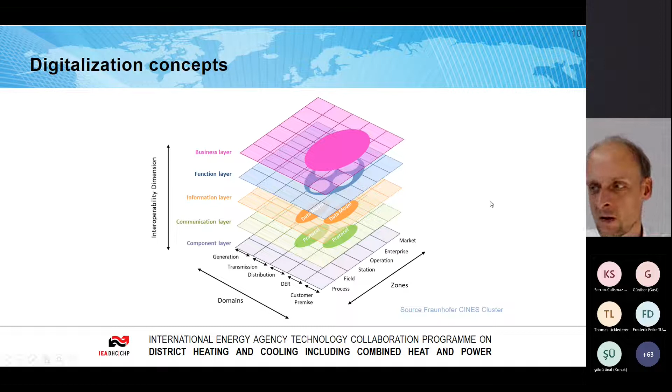For our action, this entire picture would be much too big, so we focused on a smaller scale. Our three main aspects in the TS4 project are, first, optimization of real-time operation. For digitalization here, we also include the idea of predictive maintenance of substations, pumps, or other components within the system.

The second is increased efficiency in planning procedures - using digital methods for planning, expanding, or transforming district heating schemes. The third main aspect is the implementation of new digital business models and business processes. Of course, all three components are interconnected - these are the three main topics or focus areas where we are working.

So we structured our work into so-called sub-tasks. We start with the end use, because we strongly believe that efficiency in end use is of major importance for the entire system. Here too, digital methods offer quite large potential for optimization. We have a subgroup working on digitalization of the end use and consumption.

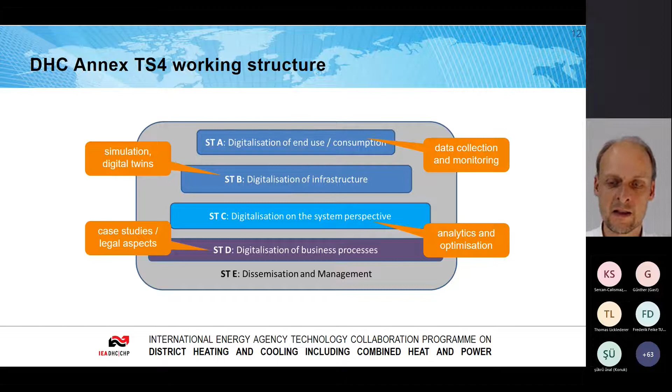We collaborate with many other organizations working on similar fields, like the German Heat and Power Association, DHC Plus, and the Danish Board of District Heating. We also have close contact with other IEA activities, like the IEA International Energy Agency activities on demand response of buildings in DHC networks, and on data-driven smart buildings.

On the other hand, we also have connections to the heat pump group within the IEA on flexibility through implementation of heat pumps in multi-vector energy systems and thermal networks. So these are our connection points with other activities within the IEA.

So first conclusions from what we can say from the first time we are working together. Digital technologies are believed to make the whole energy system smarter, more efficient and reliable, and boost the efficiency as well as the integration of more renewables into the system. So what we heard already in the morning, we need more digitalization to optimize our system on one hand and to efficiently integrate more renewables into our system.

In the future, digital applications might enable district heating systems to fully optimize their potential and to optimize the operation, and also empower the end consumer. For wider integration of digital processes, we need to tackle some challenges like data security and privacy. So we need to come up with solutions.

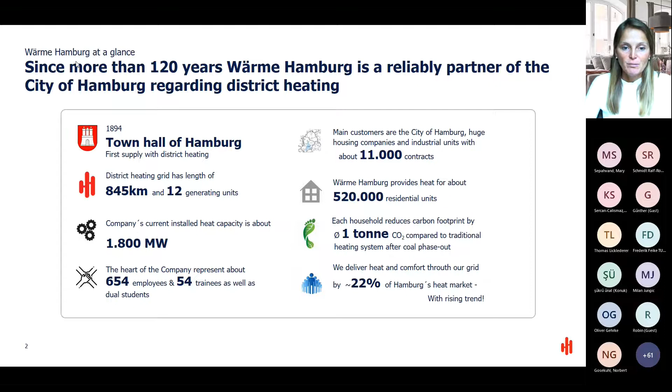So this is the IT department, let's say, on my company. But we have other projects still running, and this is what I'm going to show now. If you have a look at the next slide, for example, I brought a few examples to show what we're running currently. I think we have a huge potential to speed up digitalization, starting with summer 22 again, and in the meantime, I'll share some examples of what we're currently doing.

2 years ago, I had the pleasure to talk to this audience before, and I brought some slides for the smart meter rollout in Hamburg.

With this smart meter we installed, we can collect data every 15 minutes, 24/7, all year long. We can create this infrastructure based on data, and we would like to cross-link and automate the housing stations. We also see an application for billing issues, so we can monitor and place billing issues. We have an online data management system now for the operational data in the housings and house stations. Based on this huge amount of data, we can use it for different issues - how to steer and optimize the grid itself.

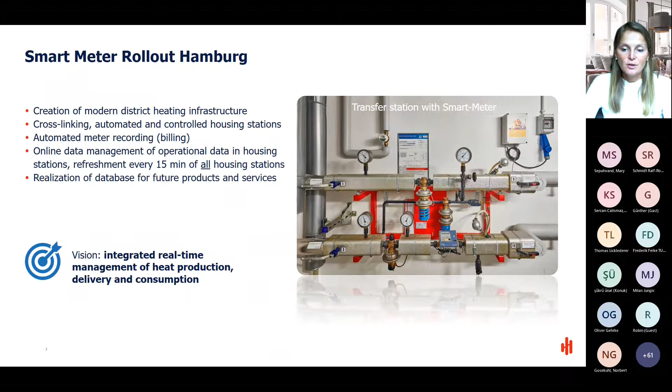And we also used this data already. Next slide, please.

You can analyze data as much as you like and as much time as you have, but usually you have a focus. For example, we looked at the return flow rates. In our technical setup, we bring heat at 90 degrees, or even more in winter, into the household, and we'd appreciate if the client returns 60 degrees. But the customer doesn't know, and we don't want to check all housing stations manually. Now we can see every single one, 24/7.

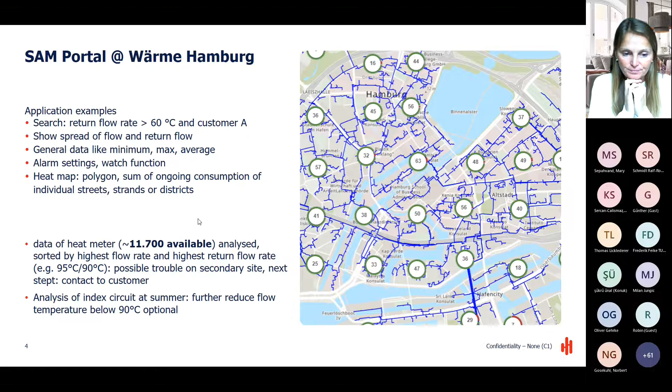With this data we collected, we can also look at other issues. What you saw on the last slide was the grid perspective, and now we can also look at the client's perspective in a different way. Usually, as Heat Hamburg or Wärme Hamburg, we deliver in the cellar, and there we have a heat meter which sums up the whole building, not each apartment, because that's not our market yet. But there are many other companies which deliver with smart meters and other technology to every apartment, to the end consumers.

We have a cooperation here with Lean Heat, a daughter company of Danfoss, which offers an IoT and artificial intelligence option. We can share our data from the cellar, which we provide online - in this case it's not online, but we still have all the data it supplies.

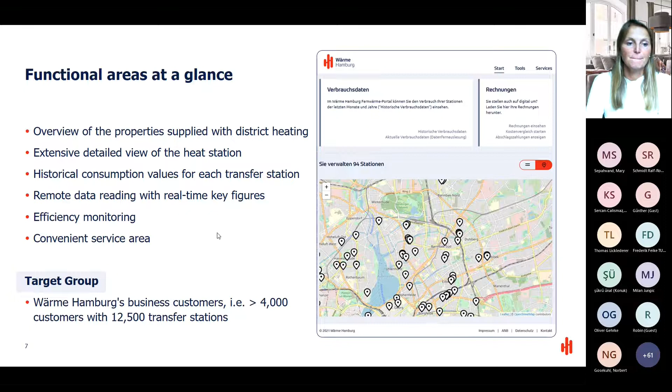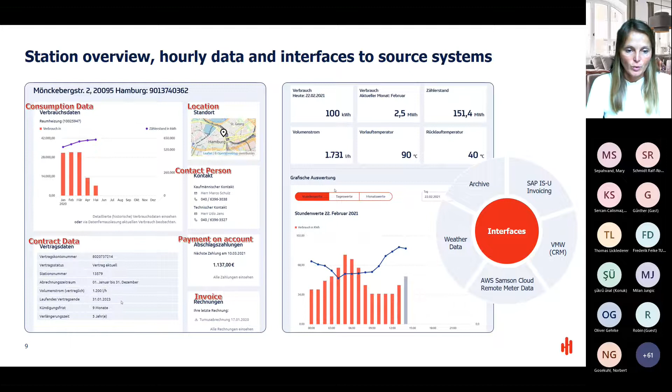So here you can see all the interfaces for the billing, for the customer relationship management, also for the cloud data, for the weather data. So this is just a glance at what we can see online 24/7 from the client's perspective.

Next slide, please. Then we also have a house connection portal for the other companies in Hamburg, for the gas grid, the electricity grid, and the water. So this client can also ask via this channel, oh, I need a heat contract as well.

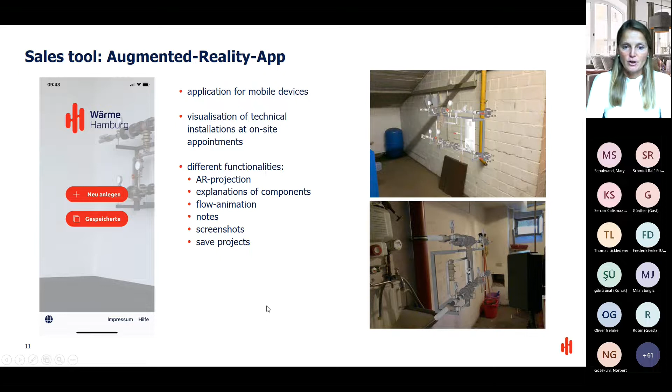So for the conclusion, let's say from the sales perspective, because I'm in sales, many issues I shared, but of course we have many other issues which will be sped up next, starting for digital twins or for many other issues. But this will be another hour to share with you.

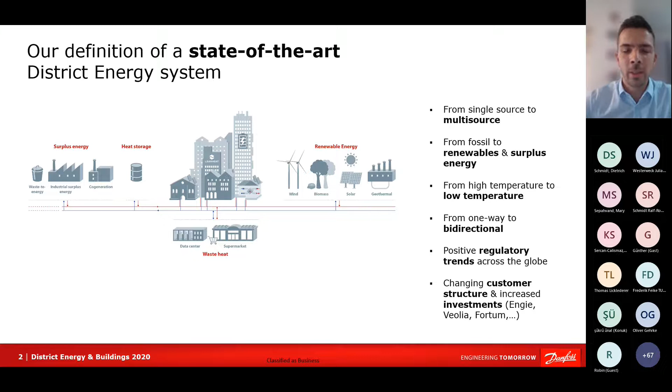Now, as I think was already indicated through Ms. Westerweck's presentation, more or less everything she spoke about was related to digitalization. We see it very similarly: digitalizing the complete district energy system, basically from plants to homes, is the one thing that enables us to operate these systems in a smarter, more efficient, and more reliable way.

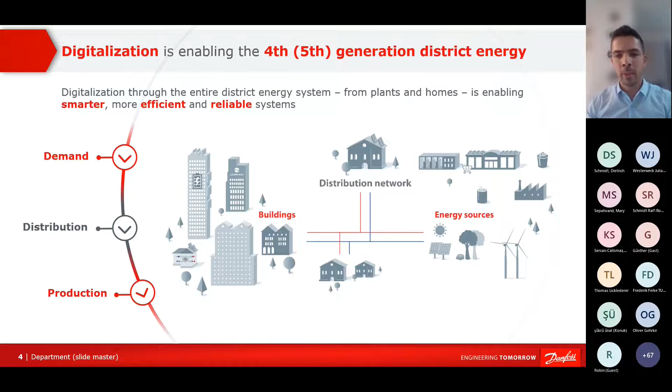Of course, we need to do it in the right way. When we talk about improving efficiency, improving production, optimizing the complete chain of a district energy system, we always need to start with the demand. I think we cannot emphasize it enough, and we need to repeat it constantly. Optimum primary network starts with the optimum secondary side. In these terms, we are also trying to develop our digital portfolio to support this.

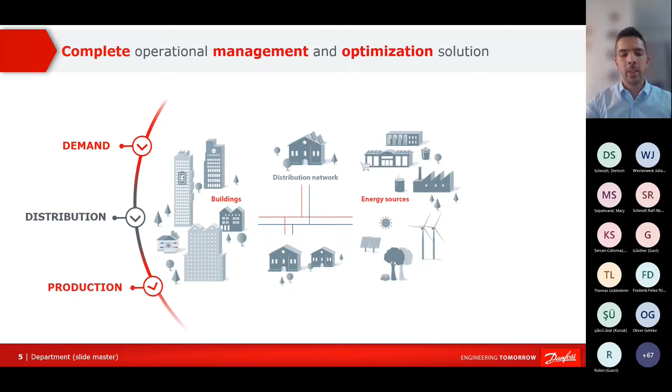Basically, we always follow the proper line. We start with optimization of the demand side, we continue with distribution, and then at the end we optimize production. Of course, it's not a one-step thing. We need to do it constantly, so it needs digital technology that we can run 24/7, the complete process. So how do we do it?

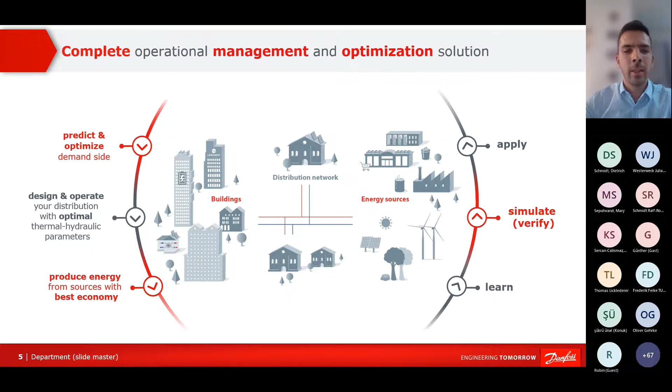Basically, on the demand side, we are trying to predict and optimize the demand side parameters. And here, we already saw in Ms. Westerweck's presentation a schematic of our Leanheat solution.

What we can do is, by using artificial intelligence, collecting the indoor sensor data, collecting the weather data, and combining this with the district heating data, we basically enable short and long-term demand prediction on a building as well as on a network level. We also enable different kinds of algorithms for auto-commissioning, for running this system in a more self-adaptive way. This means we can optimize building heating parameters like secondary side supply temperature.

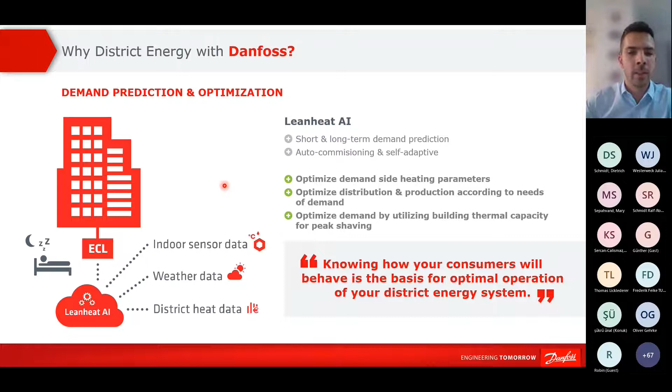Basically a constantly optimized heat curve. We can use this data from the building to optimize the distribution and production according to the needs of demand, to have a more demand-responsive system. We can also use the data from the heat consumption, the load curve, to optimize the peak footprint of the building by also using the thermal capacity of the building, with the goal to shave the peak loads, and we can do that up to 20% according to the projects we are already doing.

This is basically the goal of the Leanheat building: to make the load curve more in line and to cut off the peak, through peak shaving, but on the other side also to provide the data that we need to efficiently run the primary side.

And here, when we talk about the distribution, we have a solution called Leanheat network. It's basically a thermohydraulic modeling solution. It can be used in two ways. When it's offline, it can be used to efficiently model district heating networks for reconstructions or new-built networks. When we connect it with real-time data, we can use it combined with a calibrated network model to simulate the network conditions in every millimeter of the network, which allows us to evaluate different what-if scenarios and to prepare the most optimum distribution plans.

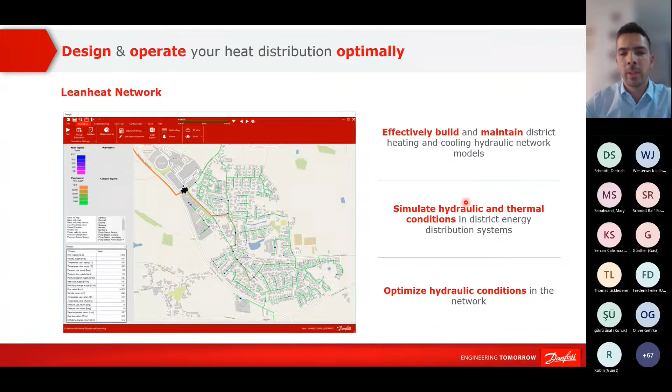I will skip these two slides to make the time shorter. I basically explained this already on the first slide.

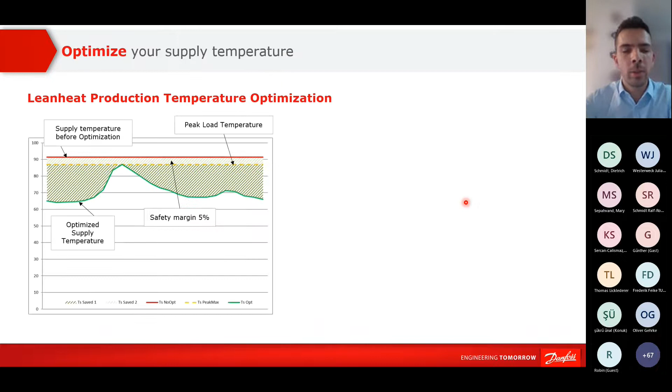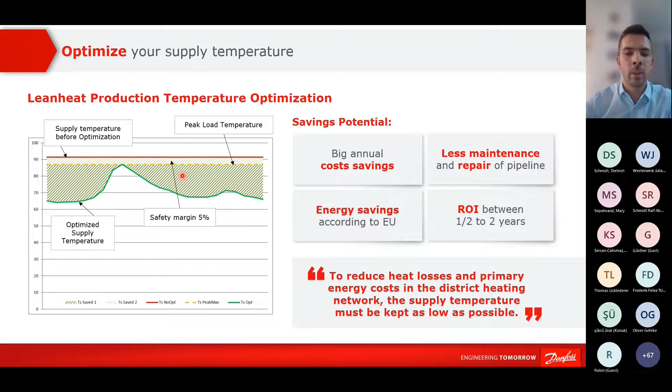And then, of course, the last part of this solution is Leanheat Production. This is basically the module that allows us to optimize the production sources. Here we are mainly focusing on two things. One is to optimize the supply temperature for the network, meaning we are moving from the traditional way of running a system on a production curve based on outside temperature. We are trying to be more proactive, based on the demand forecast and the transport times in the network, calculating the most optimum supply temperature for the network at any given time, thus ensuring that on average we are lowering the supply temperature and ensuring savings and lower network losses.

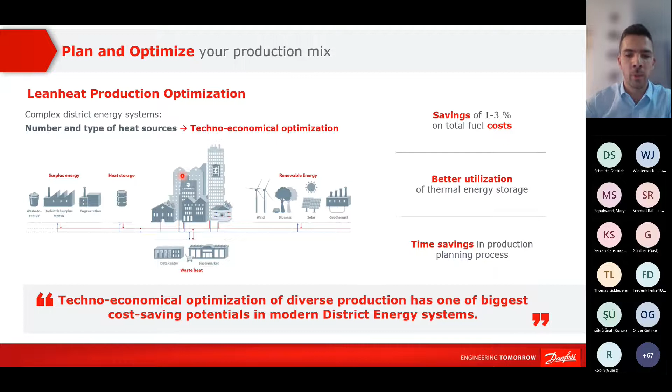On the other side, we also need to optimize production sources, because in modern networks we have multiple production sources and the complexity is increasing. We are constantly in front of a question: what combination of production sources is, at this given point in time, most cost-effective and technically feasible? This is why we are again using the Leanheat AI technology, based on all the input data, from financial data to demand prediction to technical boundary conditions, trying to calculate the most optimum combination of production sources, from a technical point of view as well as cost-effectiveness.

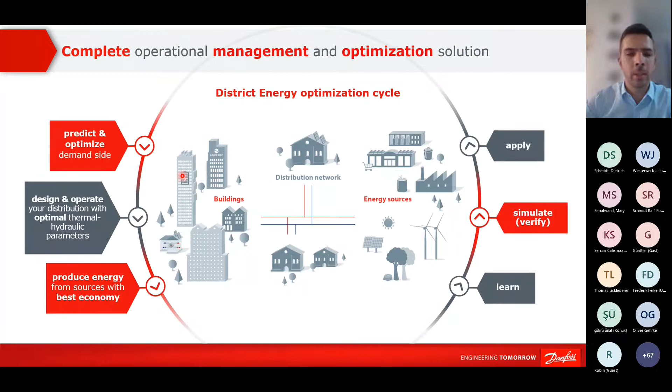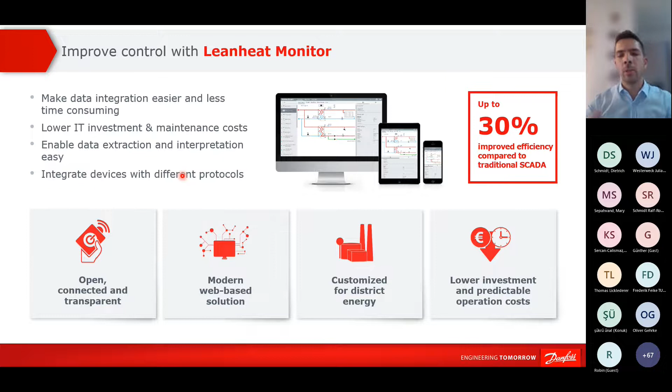By that, we are basically trying to close this circle. Of course, to perform all of this, we also need to collect the data. Here we are using our solution, Leanheat Monitor, which is a web-based solution that allows utilities to connect buildings, network measurements, and production sources. We are developing this solution fully customized for district energy, so it's much easier to implement compared to some other more industrial SCADA solutions.

At the end of the day, our goal is to offer an end-to-end portfolio of solutions. As mentioned, from the secondary to the primary side, our goal is that these things are compatible and easy to integrate between themselves, but on the other side, we are also building them on open protocols, so individual modules from this solution can be implemented also into third-party systems.

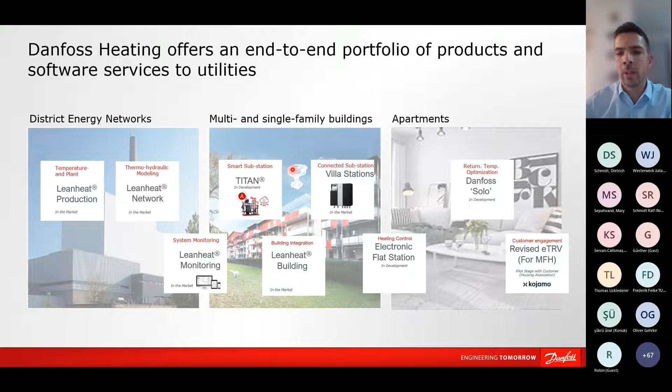Of course, it's not everything only software layer. We are working also a lot on intelligent solutions for physical products, like the Titan algorithm, which we are developing to optimize the control curve on the controller level for each building or substation individually, to perform predictive maintenance, and to detect different kinds of things like heat exchanger scaling and so on. So really a lot going on, too much to mention everything today.

Coming to conclusions, yes, and here we are. So that's it. Sorry for running really quickly through the presentation, but I hope I was clear enough and you were able to catch the most important points.

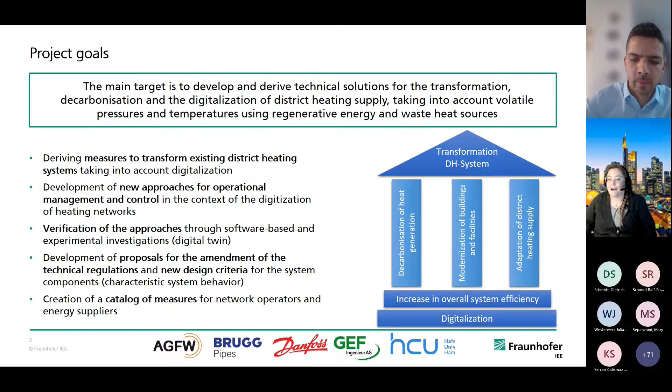Next to these approaches, the amendment of regulations and guidelines will be examined. As a summary, we are working out a catalogue of measures to bring our findings from research to the practical world. To realize the project, the test facility District Lab will be used as part of the experimental investigations.

Secondly, we have a management system and control concept. This unit serves for the basic control of our laboratory, but also for the development of new operating strategies and control concepts for flexible heating networks. That is, of course, of greatest importance for digitalization, and this includes also the testing possibilities of several components like heat pumps, pipes, and valves.

And last but not least, there's also a pipe test bench for mechanical tests of piping systems. By the use of this test bench, it is possible to carry out real tests of pipes, components, different lengths, techniques, and bedding materials.

Following this very short introduction of the District Lab, it has to be stated that the test facility, beyond the project Urban Turn, offers experimental and testing opportunities for network operators, energy suppliers, as well as system planners and component manufacturers of innovative district heating networks and, of course, district heating applications.

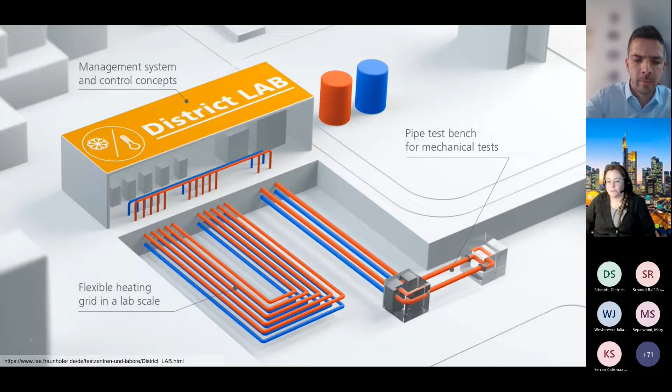But let us now return to the project Urban Turn in the context of identification of challenges for the implementation of transformation strategies for existing networks. We are analyzing new requirements, obstacles, bottlenecks, and potentials of the transformation, taking into account approaches of digitalization. As part of this work, existing design criteria are being scrutinized. We are currently completing a first draft summarizing all these aspects.

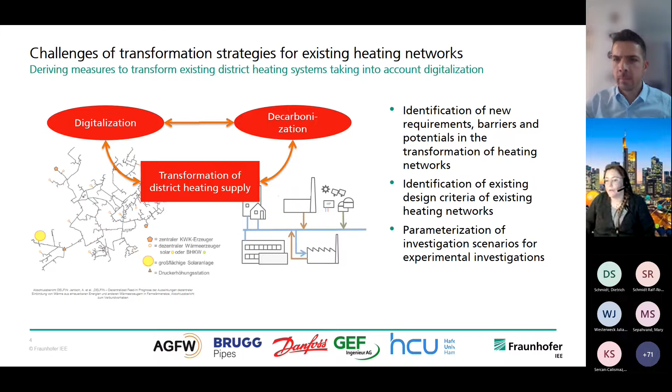As we've seen, the analysis of the previously shown work is the main basis for the software technical implementation at the District Lab. As part of the first step, the development and validation of a central control system as an interface for operating, regulating, and controlling the test facility is foreseen. This picture gives you a first impression of how it will work.

In the course of this work, the components of the test facility will be connected to hardware-in-the-loop components, and these are then connected to an automation system that carries out central management, monitoring, and control. The measurement data are then handed over to the main management system and controllers, and the interface. A central calculation unit then allows the experiments to be carried out.

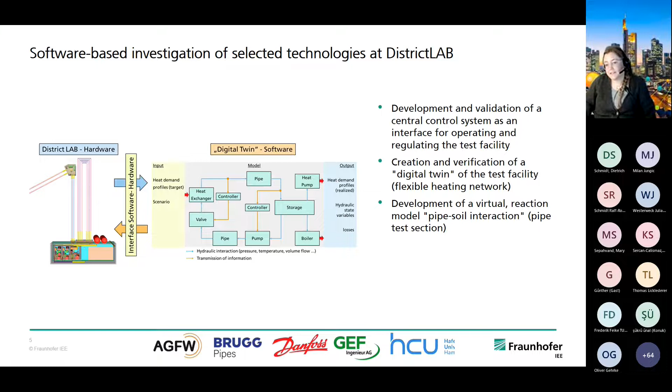In addition to the control system, a digital twin of the flexible heating grid and the pipe test section is created, and these are used to carry out and control the experiments. So we will program them and connect them to the district lab, and then control it with the help of the district lab.

A first version of the digital twin of the flexible heating system or heating grid is available right now, and it's working well, but we have also put a lot of work into equipping it so that we can show or simulate more temperature levels. The basic scheme of this digital twin of the flexible heating grid is shown here.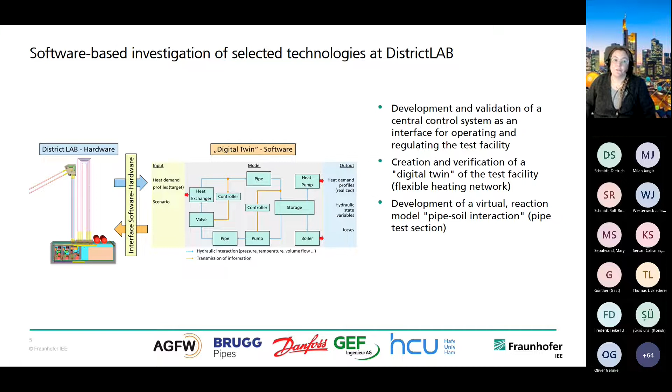And the last step for the development of the software-based investigations of selected technologies is the preparation of a measuring point plan for the implementation of investigations at the district lab.

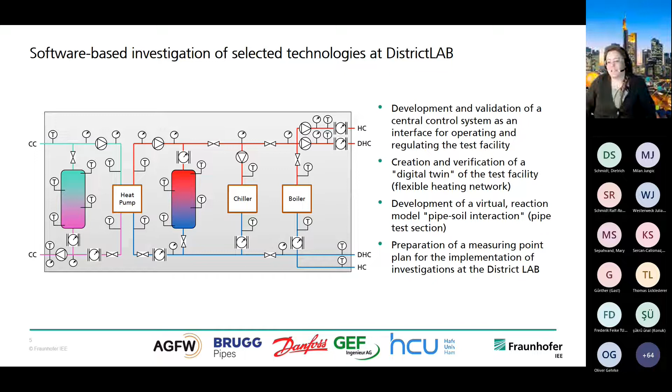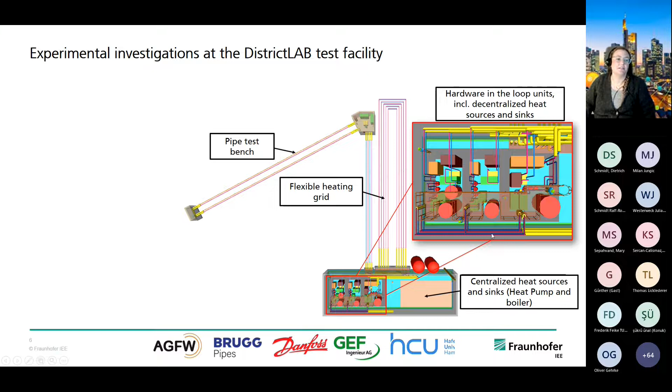To give you a short impression of the experimental investigations of the district lab test facilities, I will give a short introduction to the main setting of the district lab, represented by means of a CAD drawing. You can see here the pipe test bench, the flexible heating grid, the hardware-in-the-loop units, and also the centralized heat sources that are acting as sinks, so to say.

As part of the investigations of the flexible heating grid, given here in this red circle, the focus is on investigations of different supply scenarios to identify possible critical operating variables, examining different supply scenarios with regard to their potentials but also their obstacles. So everything has to be taken into account by carrying out these experimental investigations, in order to meet our goal at the end.

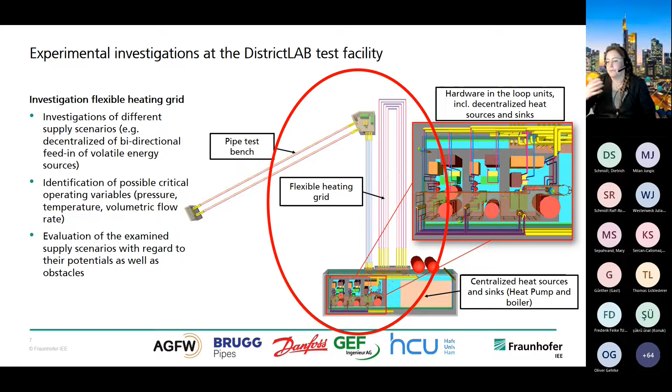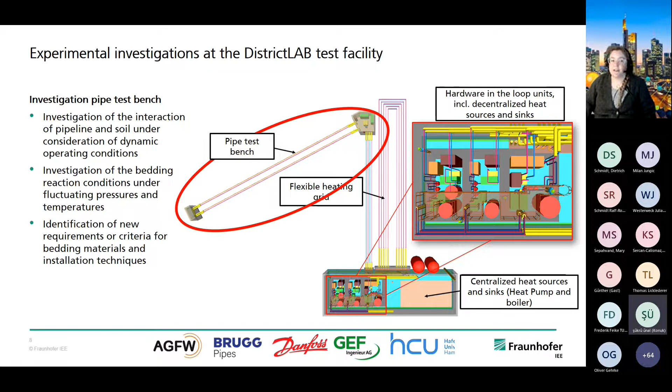The next topic is the investigations at the pipe test bench. You can see it here in this red circle again. These are focused on investigations of the interactions of pipeline and soil under consideration of dynamic operating conditions, and also on investigations of bedding reactions under set conditions. The identification of new requirements or criteria for bedding materials and installation techniques also have to be investigated as part of these experimental investigations.

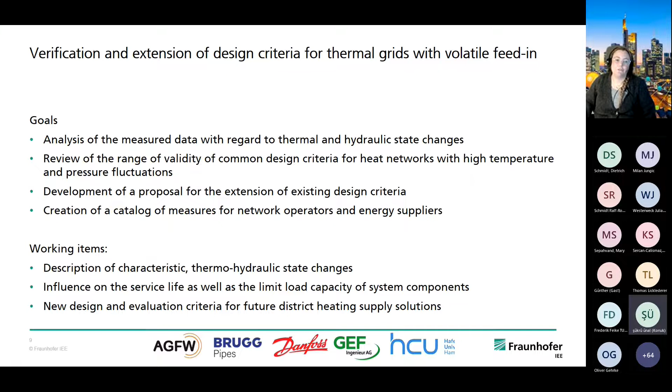I'll return to the beginning of my presentation. The verification and extension of design criteria for thermal grids with volatile feed-in are a central issue. Based on the findings of the experiments, we will develop a proposal for the extension of existing design criteria and create a catalog of measures for network operators and energy suppliers, as said at the beginning. To realize this working item, we have to analyze and describe the characteristics of the thermohydraulic behavior, but also the influence on service life and the limit load capacity of the system components, to arrive at new design and evaluation criteria for future district heating supply solutions.

This was a very, very quick overview of our projects. It would be great to answer your questions.

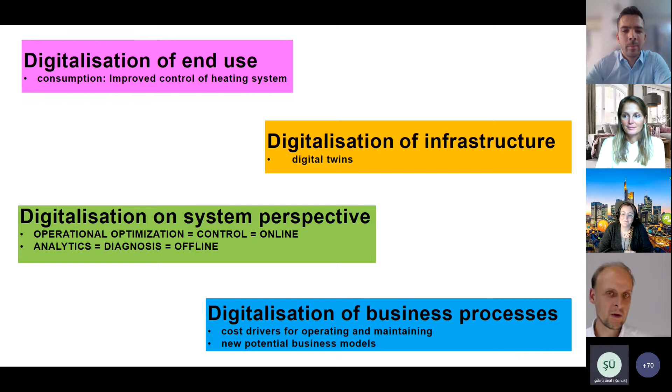So then what about the end use, what about the production side, and here we have the operational optimization. We have to control, we are online, we have this concept, but on the other hand we can also do analytics, running analytics and checking offline in larger steps how to optimize the entire system. And what we also touched on here is a question: who is earning the money? Where's the business concept behind it, especially checking the cost drivers for operation and maintaining?

As Julia Westerweck mentioned before, they were blind without any digitalization. It's very hard to check out what is wrong. With some digital data, or data generated by digital measures, you can really see something, and then from there you can come up with some new ideas for your system on one hand, and also maybe launch totally different ideas, like motivational tariffs, where you give some bonus if the temperatures are low, if the secondary side system is working very well.

On the other hand, we haven't really touched this idea - there we get new potential for business models. So a question also to Julia: could you think about totally new services, like offering a service in comfort? You said you're somehow securing the comfort of tenants in multifamily homes - could we go a little deeper into this? Or maybe we could also think about security services, since you have a digital connection to Wärme Hamburg, you could also see what's happening in the building, and then offer some kind of security service. Have you thought about that?